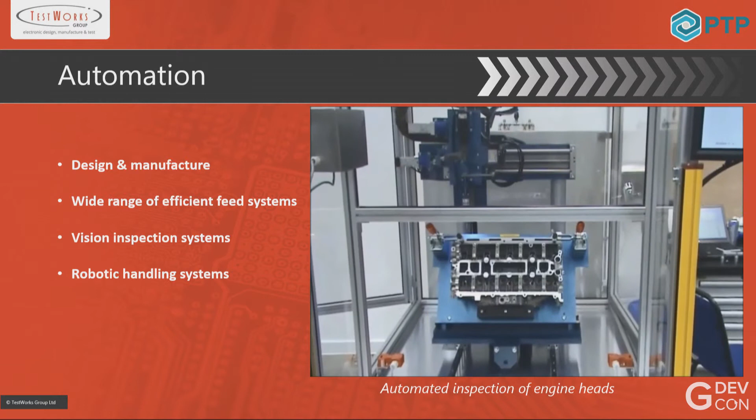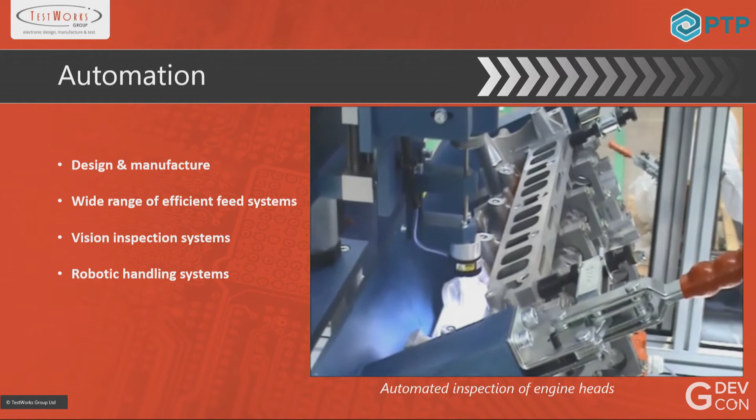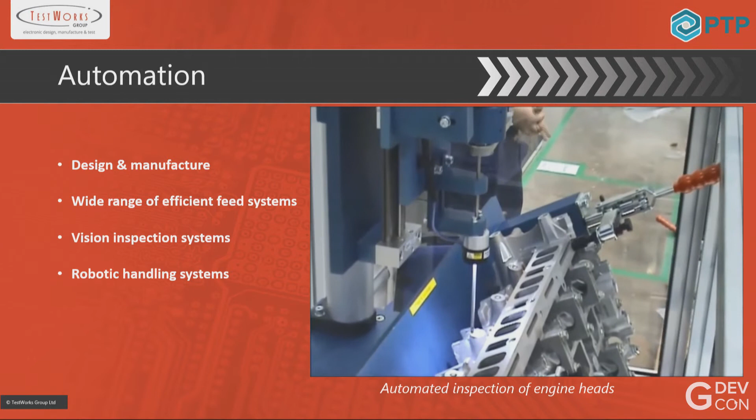Automation is an example of a project that we did. This is an engine head that's going in to be automatically inspected. Sorry, the video isn't great, but it's interesting engineering. That probe is going into the engine head and looking at the valve seating to measure whether it's in spec or not. There's a bit more detail coming, but the video gets even worse, I'm afraid - I think that's just the excitement of the photographer seeing something working. But there you go, it's actually rotating and measuring the inside of that valve seating.

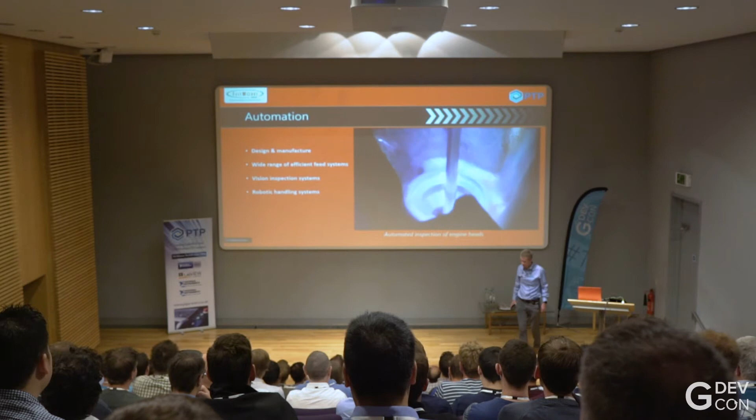That's probably enough of that. Just a bit of a boring slide now - obviously, we do hardware, lots of jigs and fixtures.

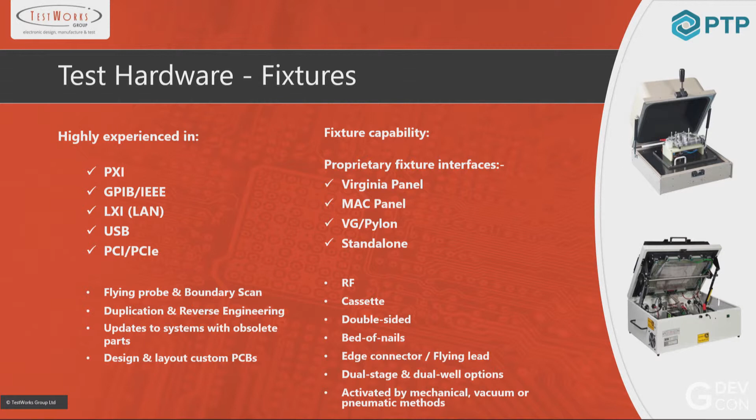Just going to a couple of the areas we tend to work in - test and measurement. This is an example of a piece of test equipment developed quite a few years ago, for Tyco safety products. They make a flame detector that can spot a candle burning at 50 meters. A lot of effort goes into the design of that and the algorithm to make sure it doesn't falsely trigger. But of course on the production line, you can't have a flame burning, certainly not at 50 meters, so a lot of effort went into replicating a flame. There's a black body source installed on the detector, vertically behind the black plate.

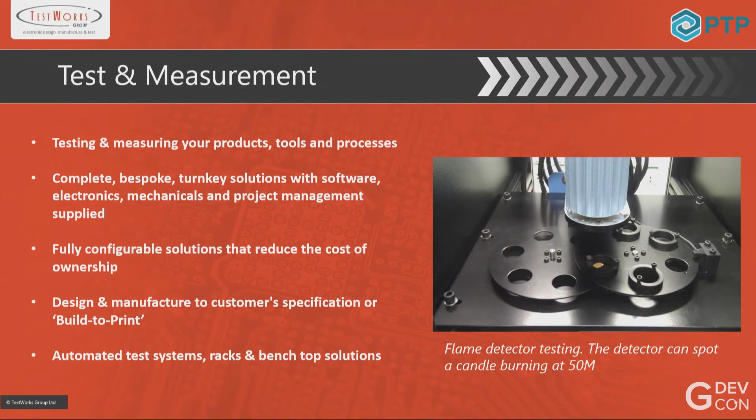And there's a flicker wheel - apparently a candle flickers at about 5 hertz - and then some filtering that goes in.

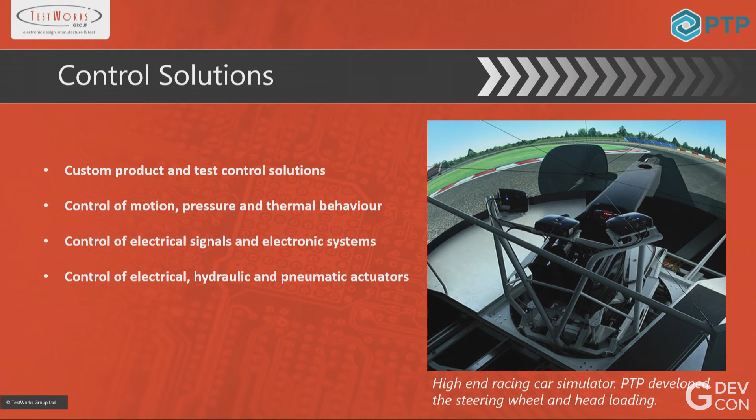That's another interesting project we were involved with - a very high-end racing car simulator. We were part of a number of companies involved in developing a solution for this. We were primarily involved with the load control of the steering wheel and the head. So as you throw the car into a corner, you get a very realistic fight back from the steering wheel - it will actually try to pull out of your hand, and your head will get pushed to one side. I personally don't think I could sit in it - I think I'd be quite ill.

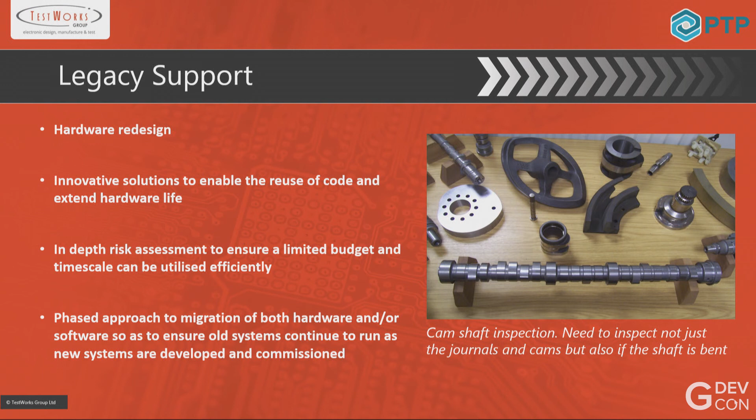Legacy support - we find ourselves doing quite a lot of legacy support, probably just because we've been around for such a long time. This is a good example: this customer manufactures or remanufactures camshafts. They have a piece of equipment that's very old, 40 odd years old, and they wanted the control system upgraded. So we put a new control system in and gave them a LabVIEW front end, so they were actually able to do a lot more than the original system did.